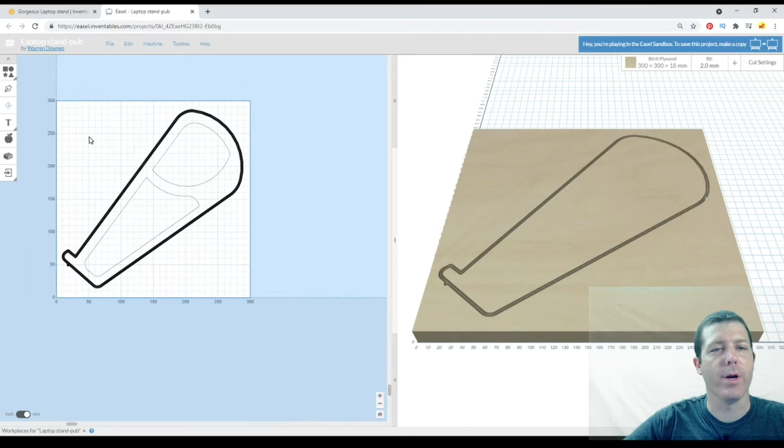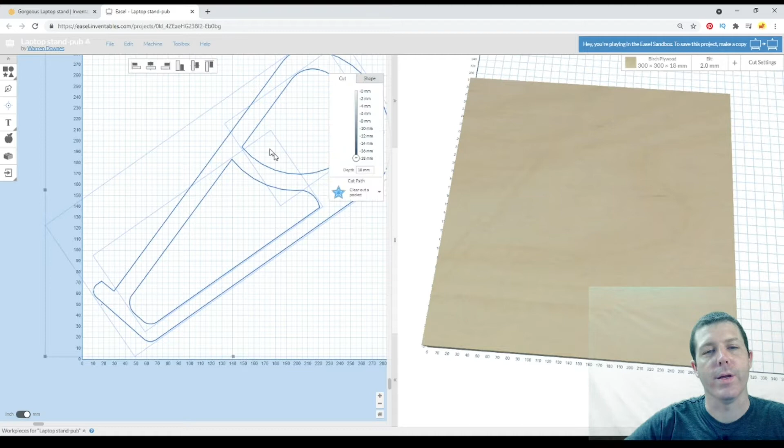You can see when I bring it in, it is a double line carve around the outside here, and the inside parts are just kind of missing. That's because when they scanned the PDF, it turned the lines into that thickness, like a fill. So when I set it to clear out a pocket, it clears out the area like a pocket. I can't do outside the line or inside the line, or else it duplicates the lines. Even on the line, it adds 2 lines, one for inside and outside. I'll show you that on all these.

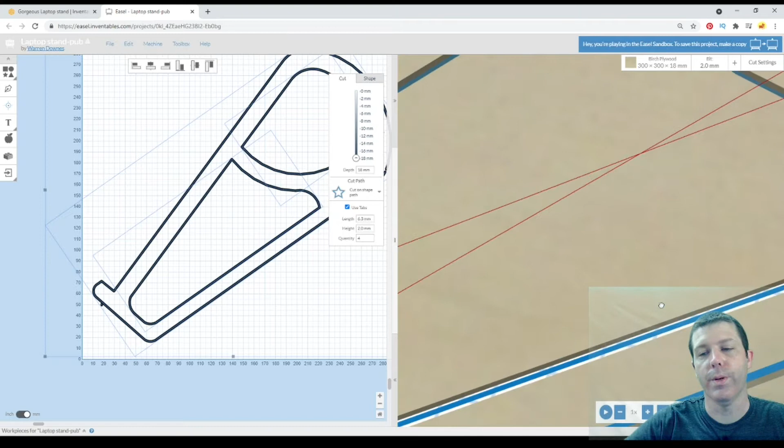It looks like a little slot right there, but when I simulate this and check out the toolpaths, you can see down in there that there are 2 discrete lines right there. What that's doing is doubling the toolpath, and it took 1 hour and 52 minutes to make this. It's going to be that much smaller than the original design because we have a toolpath on the inside and the outside of the line.

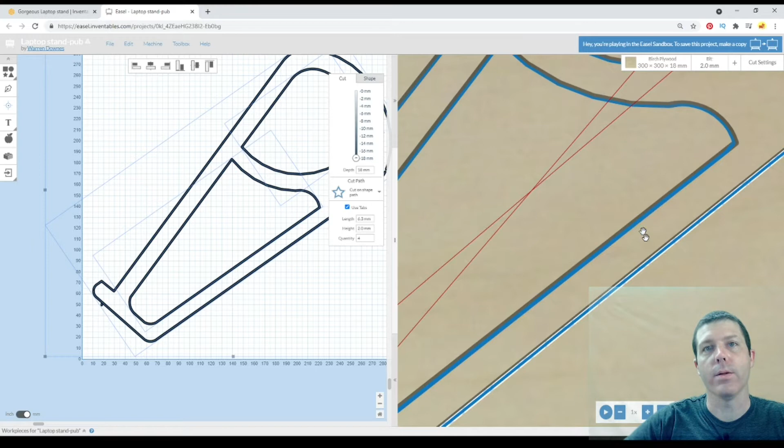So if you use this bit, it's going to be 2 millimeters smaller. Odds are most of you don't have a 2 millimeter bit, so let's say you're using an 1/8 inch. It's going to be an 1/8 inch smaller than it was originally designed on the outside, and this inside is also going to be an 1/8 inch closer. So all these wall thicknesses are actually a 1/4 inch thinner than they were designed to be, which is probably not good.

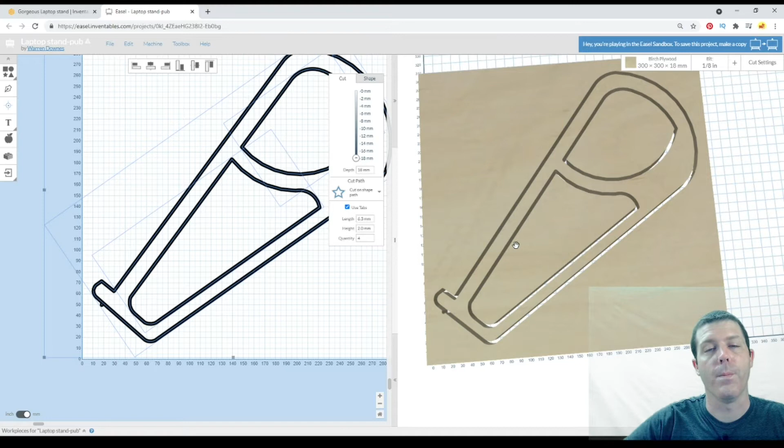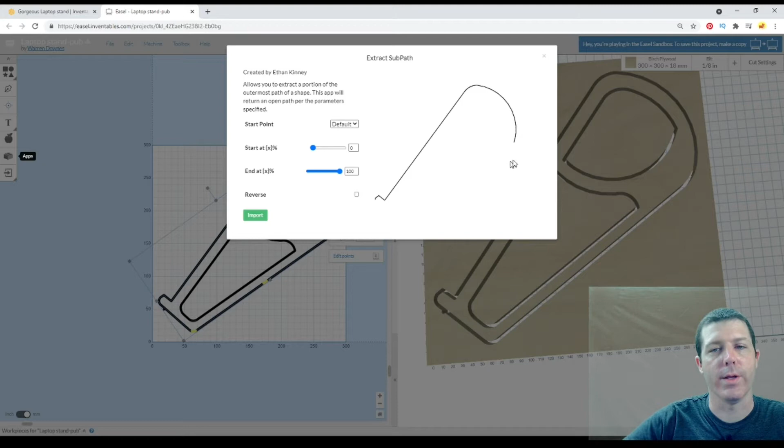So with this, we can use a few different tools to fix these sections, but I have to do it section by section, unfortunately. I'm going to grab this outside one here and use the tool called Extract Subpath, this little mushroom looking one right here. What that's going to do is draw a line around the outside. Oh, but look, it doesn't go all the way around the outside. So that's all we get from that.

And the issue with that is we've got a gap right there. We probably have another one right over that other area, which is, yep, we got 2 gaps, one there and one here. So I'm going to fill those gaps with just a little shape. Putting a line there just doesn't work right, it has to be a shape.

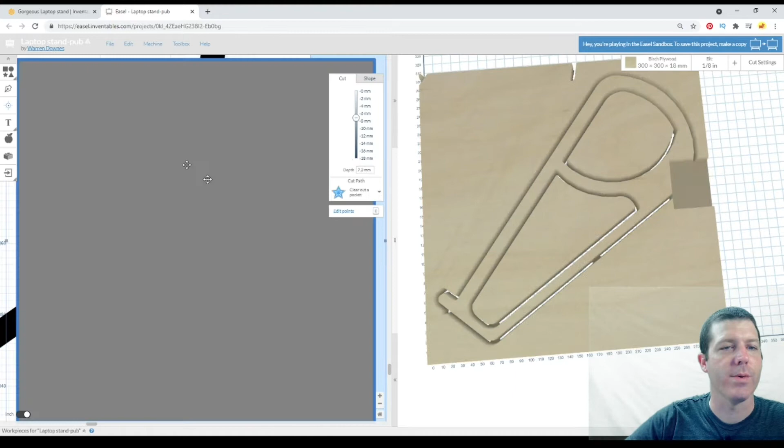So actually, we'll get rid of that square and use a circle instead.

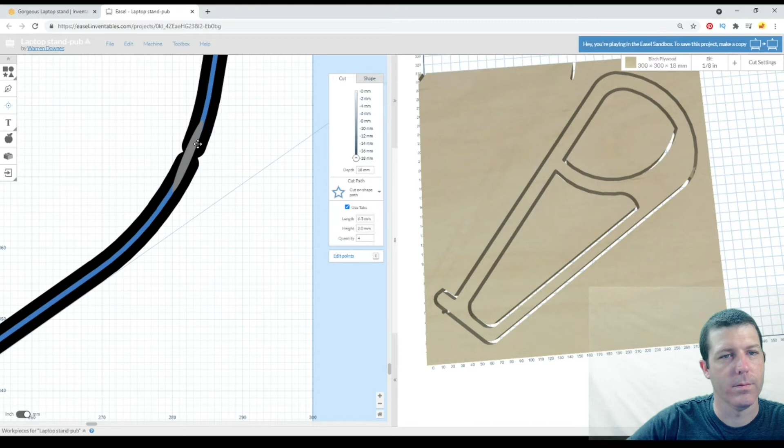Taking these 2, I can select them and combine them together by going Edit and Combine, or pressing Control-J. So what that did is combine my oval in there to that shape. Now at least that section is attached.

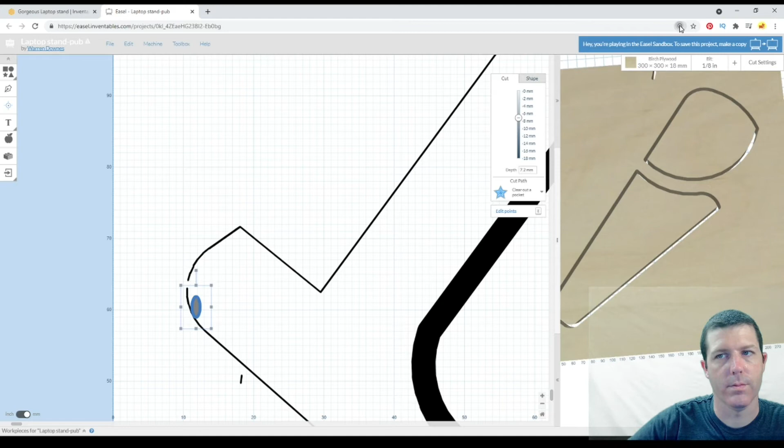Now I can do the same thing over here as well. And while we're here, we'll fix that little rogue node that's sitting down there by itself. Turn this a little bit so it fits better in there. We can press Control-J to join those, and now we have a solid shape that goes all the way around.

Now I did mention this extra little rogue part here. I'm just going to go ahead and delete that out. So now with that, we can go in here to the Extract Subpath.

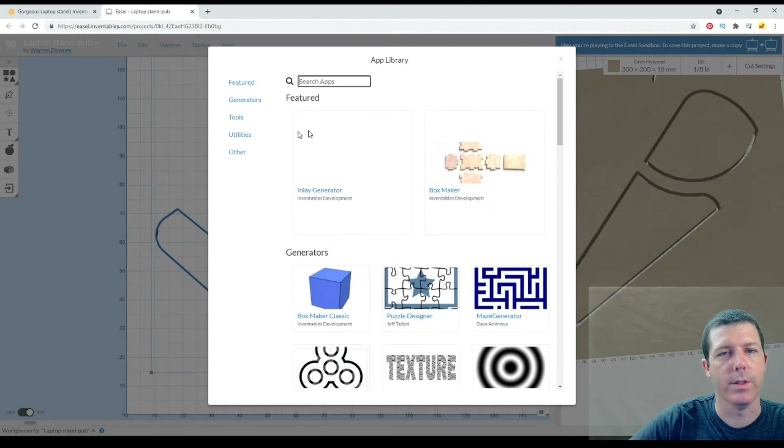There's just a slew of settings you can change here, but we'll leave them the same and extract what we have sitting there. I'm going to send this to the back, which allows me to then click the original one that was there, and we'll just delete that out.

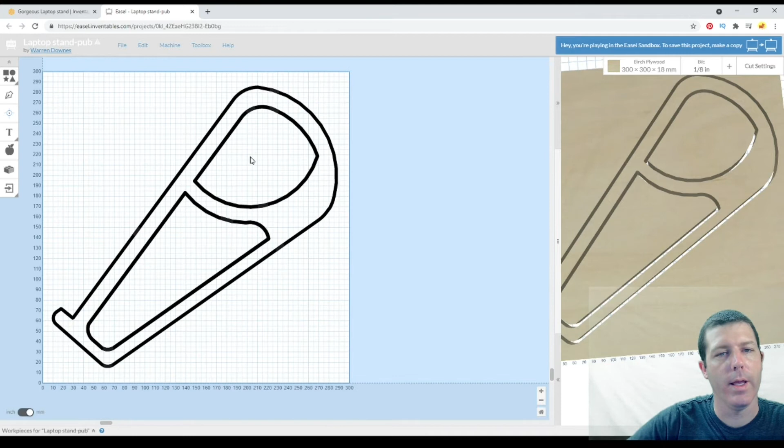We're done with that now. We're actually done with this one too, so we'll press the delete key and it will delete that one right out. Now that we've done the extract subpath for this outside vector, we can set that to outside the path.

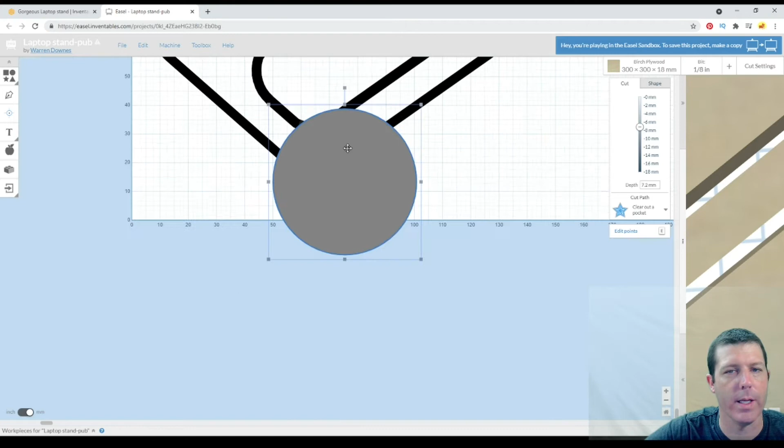Oh, I'm still getting an error, so let me hide these tabs. Sometimes they cover up the open vectors. So I've got one right there still. I'm going to throw one more circle in there and combine it, and that should fix that problem.

Actually, this one can be larger because we've already done the subpath, so we're not just bonding a gap right here. We can press Ctrl-J and join that together. I didn't quite get that shape right, so I'm going to bring it in a little bit more.

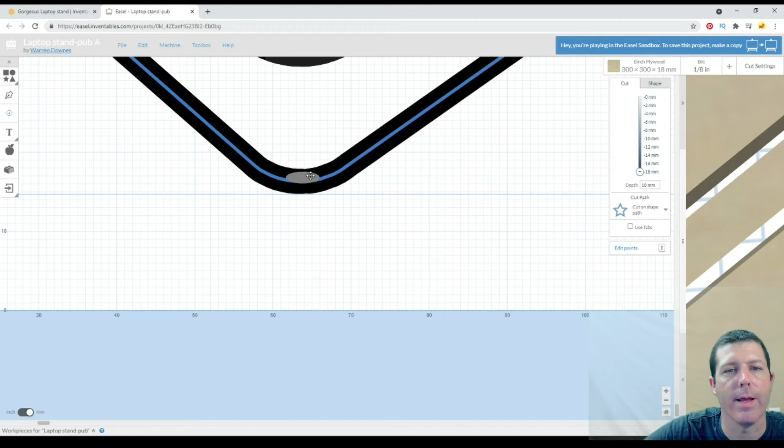Let's see if I can get that aligned perfectly. Otherwise I've got to play with the nodes afterwards, and that's just no fun. That's not horrendous now, so I'll go ahead with that, and hopefully, there we go. We can put it on the outside the way we want it.

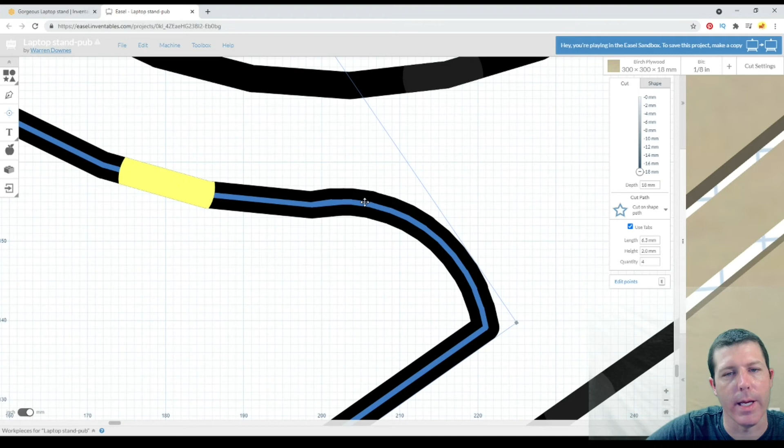Now we can do the same thing with these other ones, although I noticed they're a lot smaller, and we can just delete out the actual nodes, and it'll fix the problem that way. So I'm going to zoom out enough that we can see all these nodes.

I'm just going to select one section on the inside and start deleting these around. Tapping or holding the delete key works just fine. And then once we get into these angles over here, once we start to delete the wrong shape, like this one now, I'm just going to press Ctrl-Z to undo a few of those.

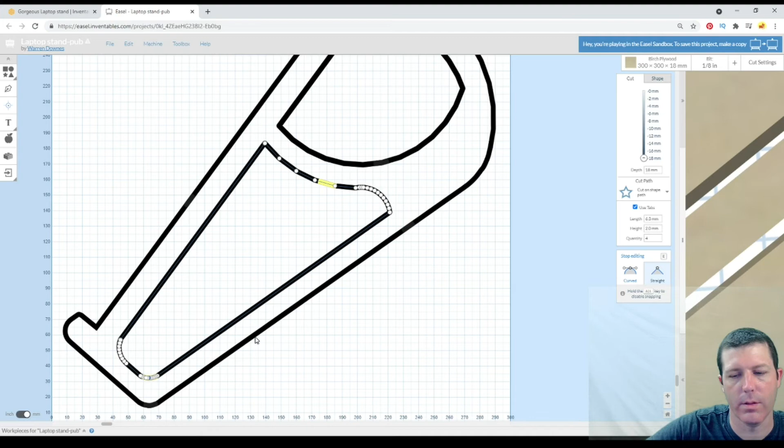And we should be okay. It looks like there's a few there I missed. So delete, delete, delete, delete. Now with that done, this one here should allow me to set it to inside the path. We're good there. Repeat that same process up here with this one real quick.

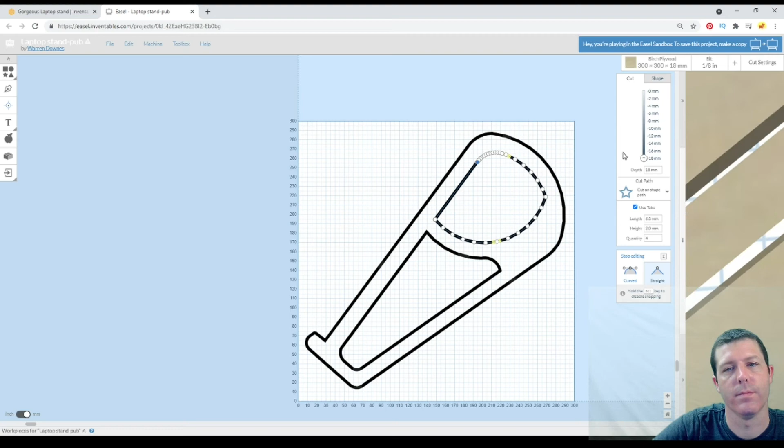Just deleting that extra layer. And that might be enough. Oh, I missed a few more there, right? Just a couple. And now with this one, we can set it to inside the path.

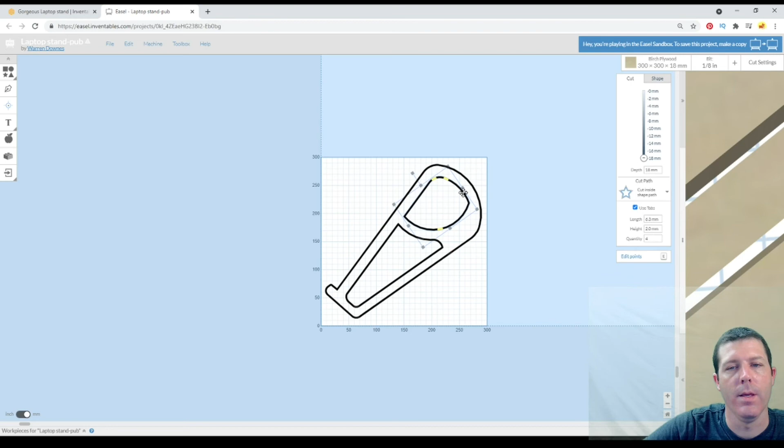We've got those set up. We can move these tabs around accordingly. And it looks like this is now from a 2-hour carve down to a 1-hour carve, and we have a lot more control over what we're doing with which area.

Now, when you do have the tabs on here, I suggest bringing them around to flat areas that are easier to sand off. I prefer to sand these with a stationary belt sander, or these inside ones with a flat sanding pad. So if they're on flat surfaces, it makes them just that much easier to sand away.

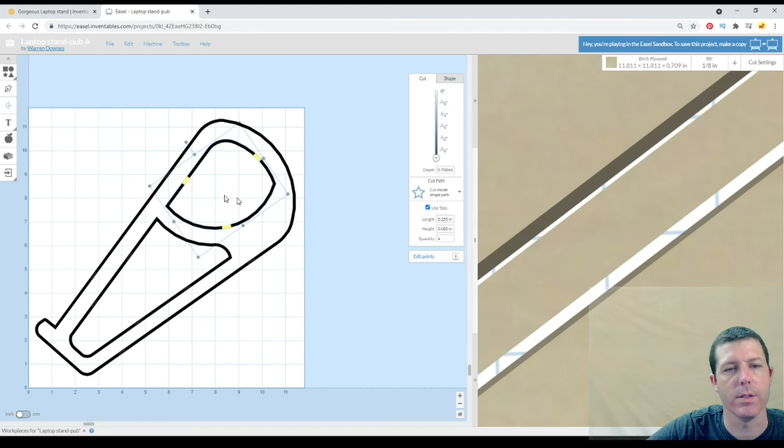And this one here, maybe come in with the spindle sander for these that are on rounded areas, or you may be able to just sand it by hand. Either way. So there we've got the tab set up, and everything simulates out in, I think, just about an hour. Let's check that real quick.

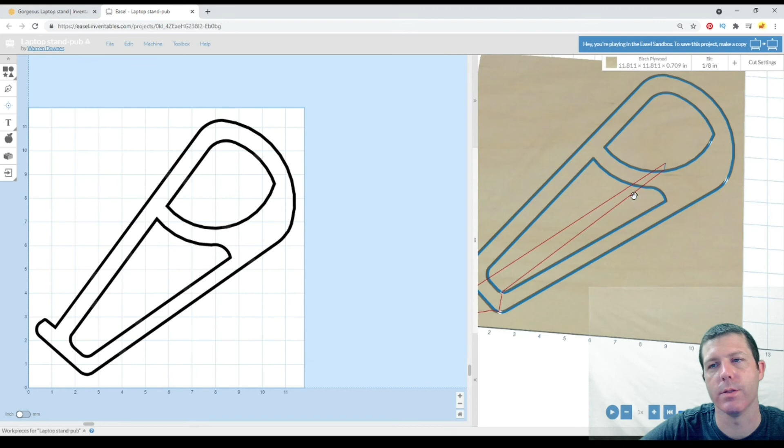Yeah, we're at 56 minutes to cut this one piece out of 0.709 inch birch plywood, which is, I think, an odd amount. Normally when I buy 3/4 inch, it comes in at 0.745. And I think this is probably the default cutting settings for this bit in Easel anyway.

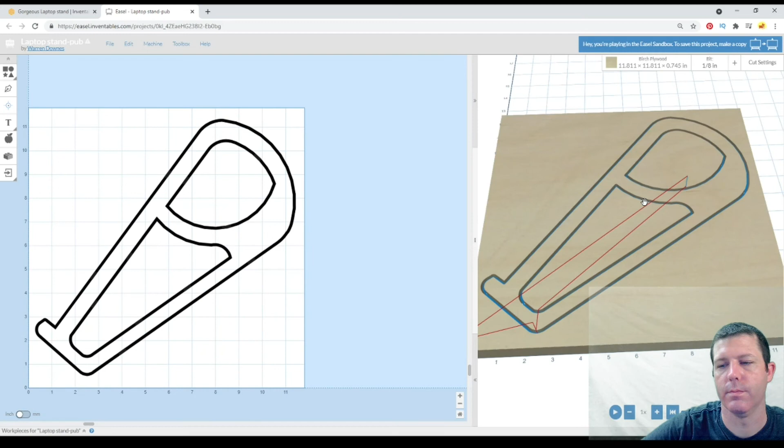So with a bit of an aggressive cut, we can cut this out with a compression bit with about 10 layers at about 7 minutes. That seems a little more realistic as opposed to the 2 hours that the project was set up for.